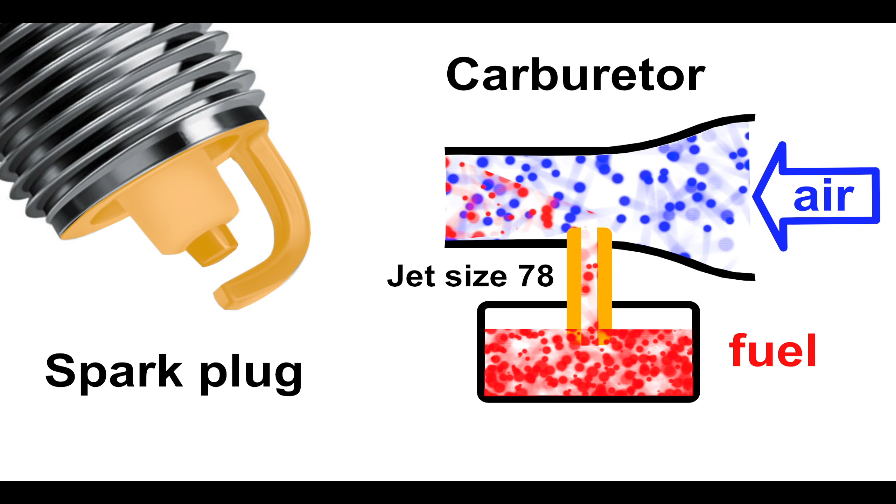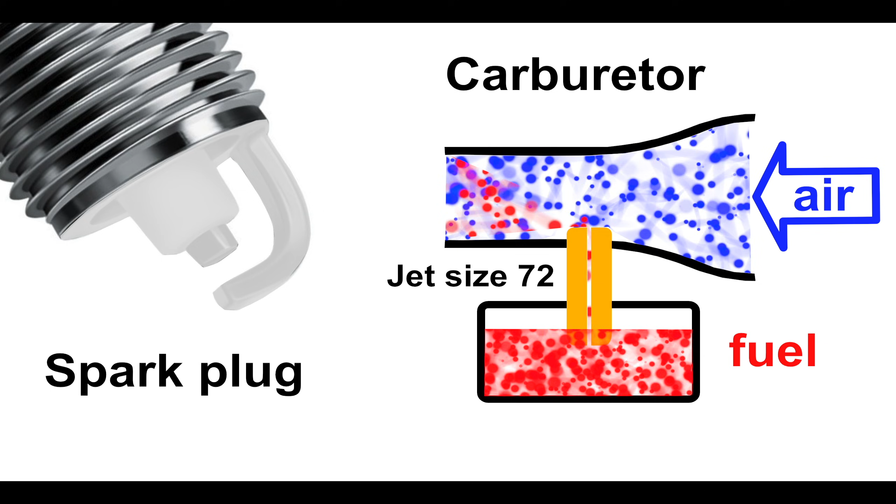First, you must know how a carburetor works. Intake air passes through a tube, and fuel is sucked up through another tube called the jet. If the jet is the right size, you get a good air-to-fuel mixture and the engine runs, and the spark plug will be a light tan or beige color. If the jet is too big, you'll get too much gas, the engine won't run well, and you'll have a black spark plug. If the jet is too small, you don't get enough fuel, and the spark plug tip turns white. A real carburetor works in the same way, but has three main parts.

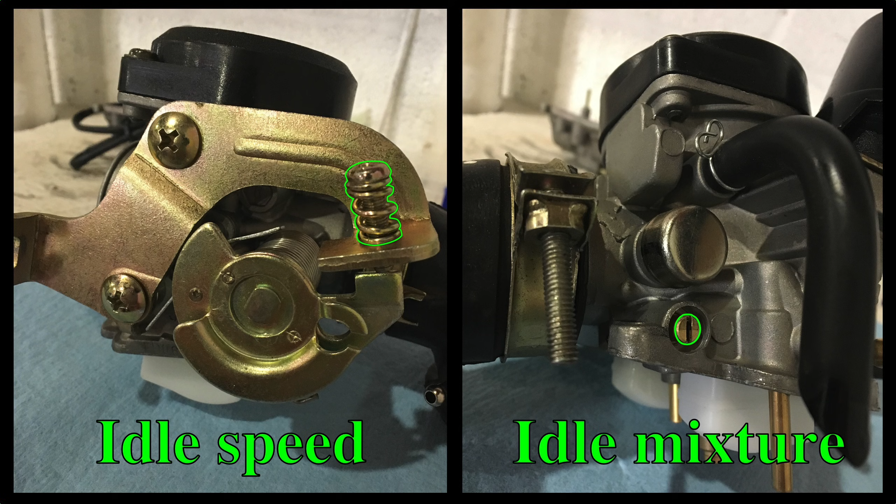When the throttle is closed, the idle circuit controls the mixture. Just above idle, the pilot jet takes over, and from quarter throttle till full throttle, the main jet controls your air-to-fuel mixture. The idle has two adjustments on the outside of the carburetor. The idle speed screw controls the idle air, and the idle mixture screw controls the idle fuel.

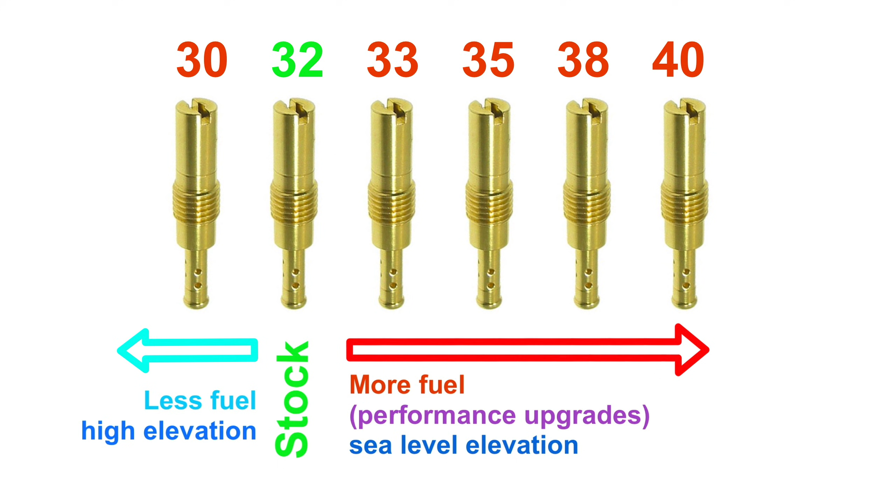To adjust fuel just above idle, you have to replace the pilot jet. A bigger jet lets more gas in. Most 50cc scooters come stock with a size 32 slow jet. The main jet controls fuel from quarter throttle to full throttle, therefore it is the most important one for tuning. Stock size is 75. Go up in size if your engine can move more air, for example, a bigger intake, exhaust, or a bigger piston will move more air. Go down in size if you're at high elevation.

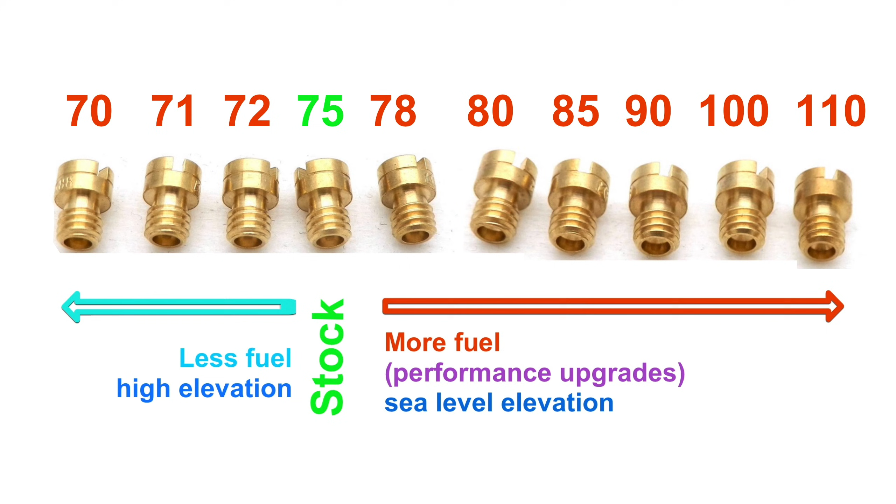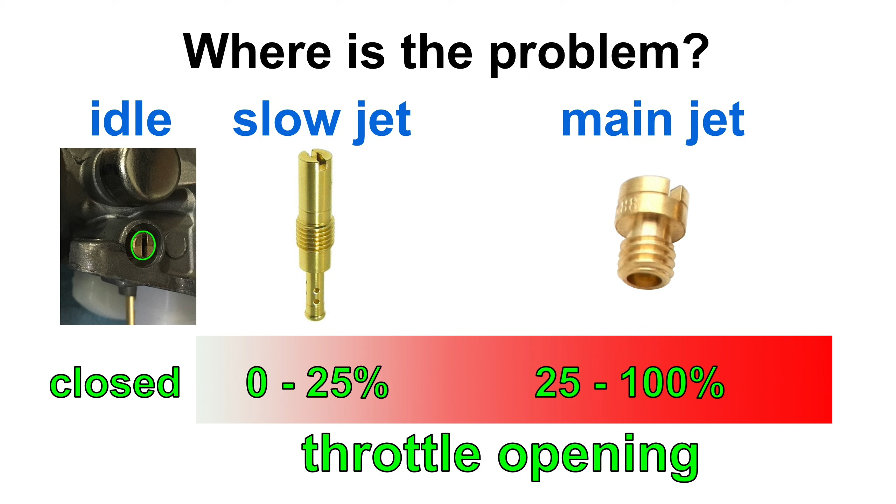Think of carburetor tuning in terms of solving a problem. First, where is the problem? If your scooter isn't idling, go for the idle screws. If it's just above idle, maybe your slow jet is wrong. 25 to 100% throttle is most likely a main jet problem. Second, you must determine what is the problem. This can be tricky because the symptoms can be similar. Too much or too little gas will both make the engine lose power.

Not enough gas will give you a white spark plug and the engine will run better on hot days and after the engine is warmed up. It may also idle better for the first 2 minutes because the idle enricher adds gas. Too much gas gives you a black spark plug and you can usually smell gas in the exhaust. The engine will run better when it's cold because less of the fuel evaporates and temporarily brings the ratio closer to the desired 14.7 to 1.

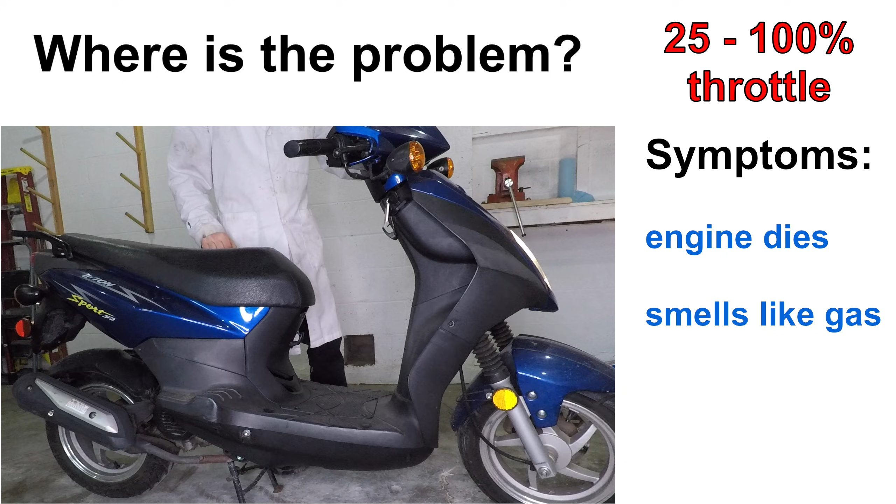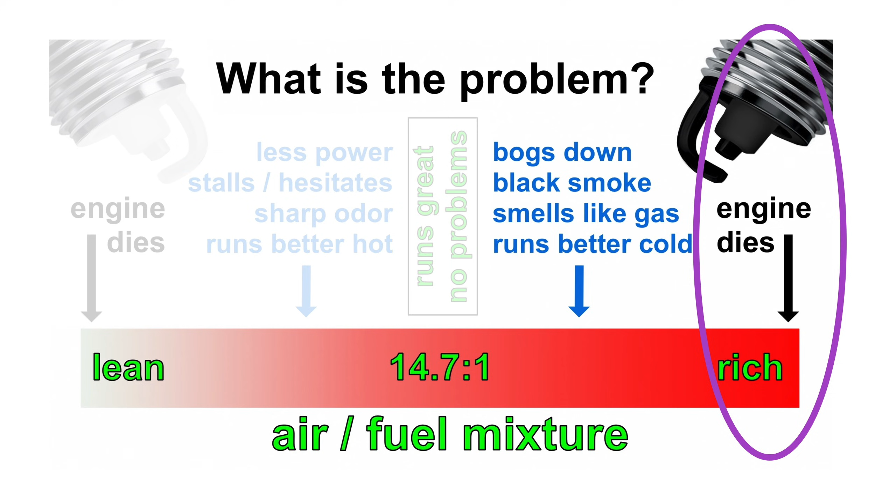Okay, let's check out my scooter. It starts right up and idles really well. When I twist the throttle, it revs up for just a second, but then the engine dies. So my problem is located from 25 to 100% throttle. The exhaust also smells like gas. I'm using a 16mm socket to remove the spark plug, and here it is. The tip is black. All my symptoms point to the engine running too rich. In fact, the air-to-fuel mixture is so far off that the engine won't even run.

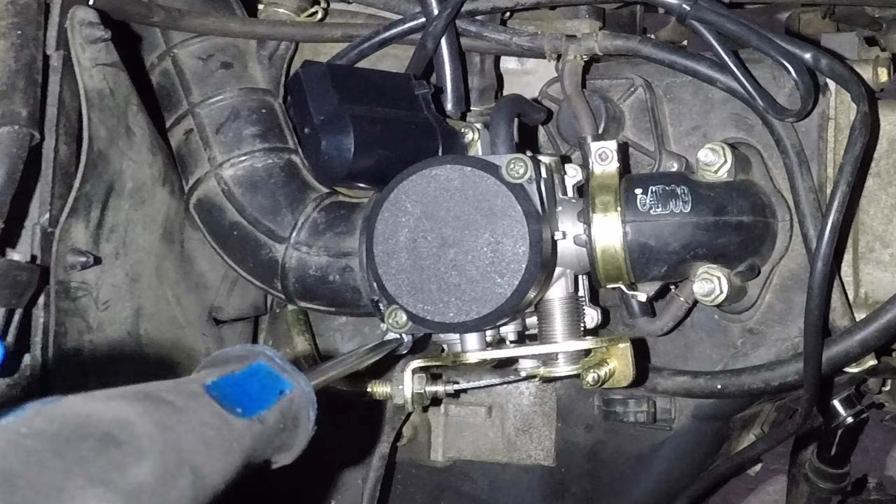To work on the carburetor, you'll need Phillips and flathead screwdrivers, a 10mm socket, and 12mm wrench. Let's pull that carburetor out. Loosen up the intake with a flathead screwdriver, the throttle takes a 12mm wrench, and the intake manifold takes a 10mm socket. Pull off the fuel hose and vacuum hose, and don't forget to unplug the idle enricher. Drain the float bowl gas into the gas tank. Take out 3 screws on the bottom of the carburetor and pull off the float bowl. Use a flathead screwdriver to remove the main jet and pilot jet.

My carburetor had a size 30 pilot jet and a size 92 main jet in it. Let's compare that to the chart. The pilot jet is just smaller than stock, but it seems to work fine. The main jet, however, is way off. I have a stock scooter. I should have a size 75 main jet. I'll need to pick up a main jet kit.

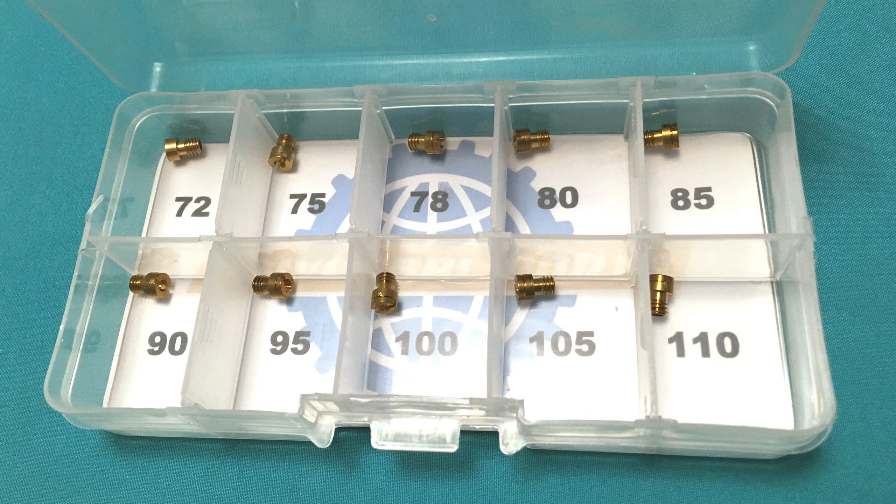I'm installing the size 30 pilot jet back into the carburetor and changing the main jet to a 75. Reinstall the float bowl and 3 screws, then the carburetor goes back in the scooter.

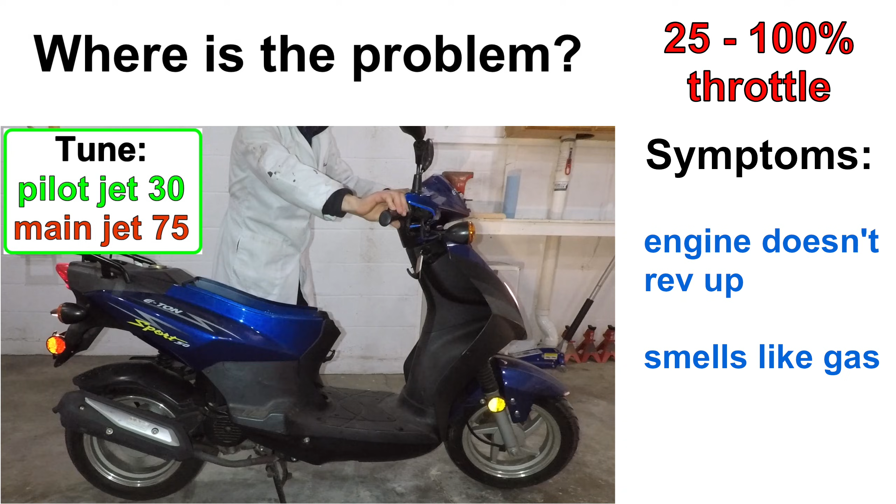Hoses first, then attach it to the airbox and bolt on the intake manifold. Make sure the throttle opens all the way when you twist the throttle grip, and don't forget to plug in the idle enricher. This time when I go to full throttle, the engine doesn't die, but still doesn't rev up like it should. The exhaust still smells like gas. It's definitely better than before, but it looks like the mixture is still way too rich.

I'm using a stock size jet, and this scooter is stock, so why doesn't it work? It's because I'm in Salt Lake City and the elevation here is 4,500 feet above sea level. At low elevation, there are more air molecules, so you can also put more gas in the engine.

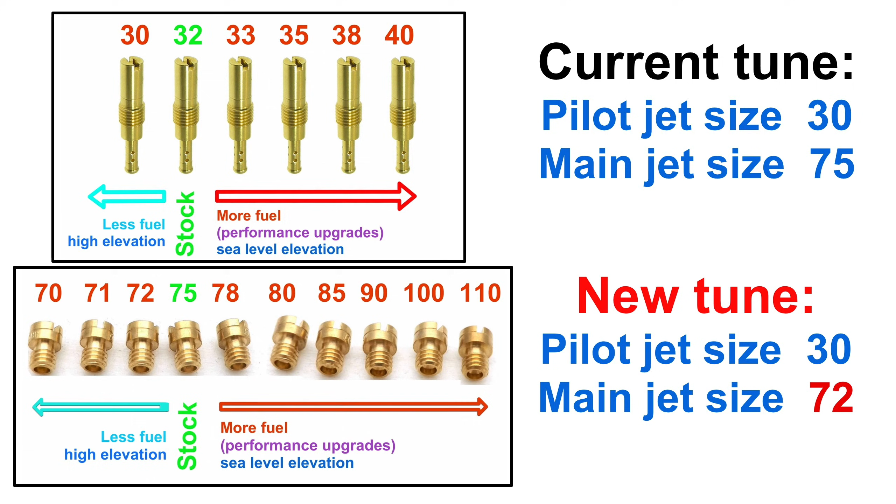Pusheen is having a great time, but when she gets to the top of the mountain, she'll need a smaller main jet because there's less air up there. Let's take another look at the chart. A scooter will actually need a smaller jet than stock at high elevation. I should try a size 72 main jet, and I'll just swap those jets.

Okay, let's see what happens with the size 72 jet. It revs up, but wait a minute, why doesn't it keep going? That's weird. It wants to rev up, but then slows down.

When you get closer to the right air-to-fuel ratio, it gets harder to tell if it's too rich or too lean. The quick way to find out is add a bunch of air by removing the air cleaner.

This time I'm going to full throttle with no air cleaner. I'm temporarily leaning out the mixture. Wow, it's really revving up now. Removing the airbox made a huge difference.

Back to the chart. The engine didn't do well with the 72 main jet until I added some air by taking off the air filter. This means it was still too rich.

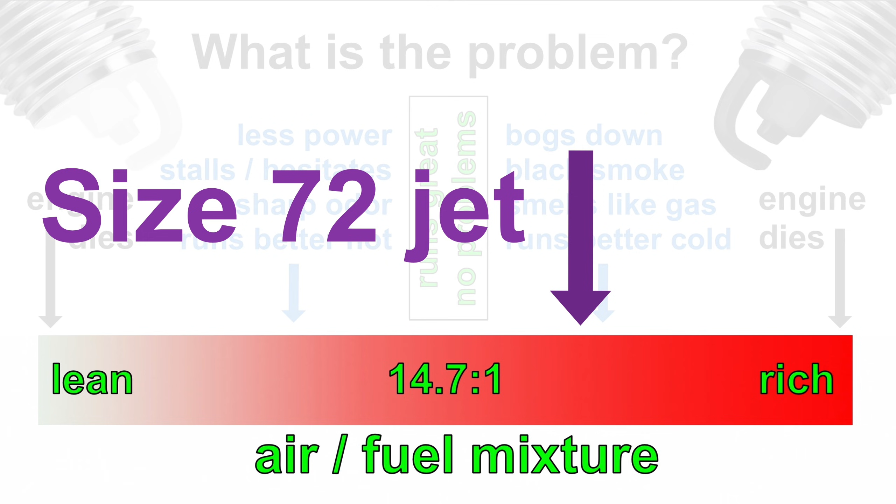I can go back in and get a smaller jet again, but the 50cc scooters are already dangerously slow, and less fuel means less power. I really like how it ran without the stock air box.

I'm going back to partsforscooters.com and picking up a foam air filter. The inner diameter of the filter should be 38 millimeters.

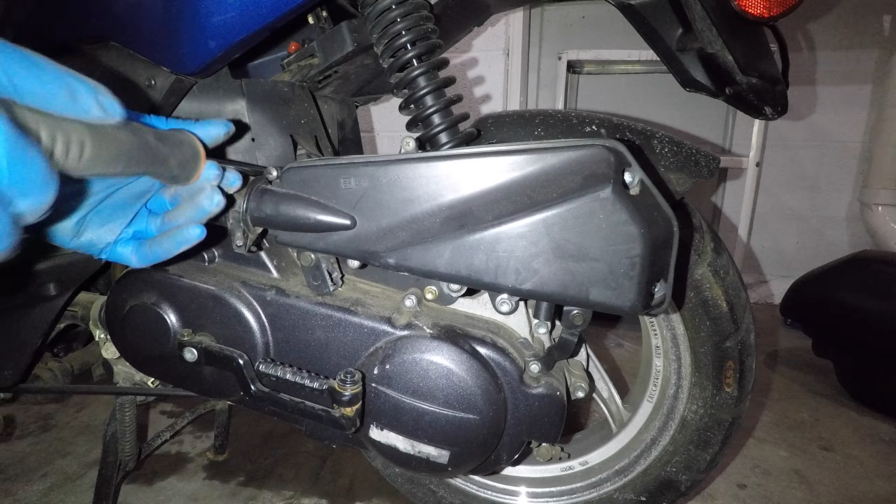Now let's open up that shitty air box. It has a restrictive paper filter and 2 bolts holding it on. One of the brackets is broken.

I'll rip that rubber intake hose out. I'm pulling the crankcase vent hose off the valve cover. I'm saving this hose and the screws. The rest can go in the trash.

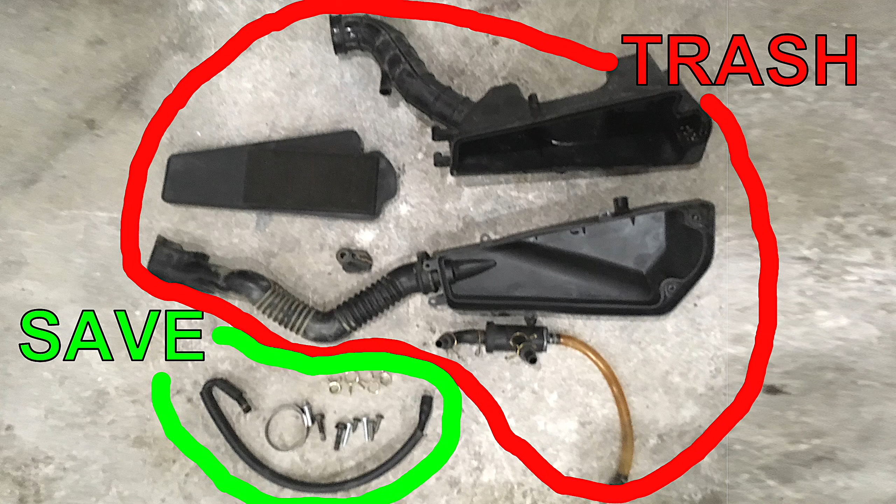Okay, now the foam filter goes on the scooter. The scooter will become much louder with the foam filter, but on the road, louder is safer. The crankcase vent hose can go into the foam filter. This just burns off vapors from your valve cover so they don't go into the atmosphere.

It's time to see how this scooter does on the road. Alright, I'm taking off full throttle with the 72 main jet, and the engine just slows down and almost dies. I thought I had the right main jet, but then I added a lot of air by installing the foam filter. Now I'll need more fuel to get back to the right ratio.

Here's the scooter with the 75 main jet, also barely moving at full throttle. I'll keep moving up in jet size. Let's check out the 80. That's much better. The scooter just takes off, but then again it's still very slow.

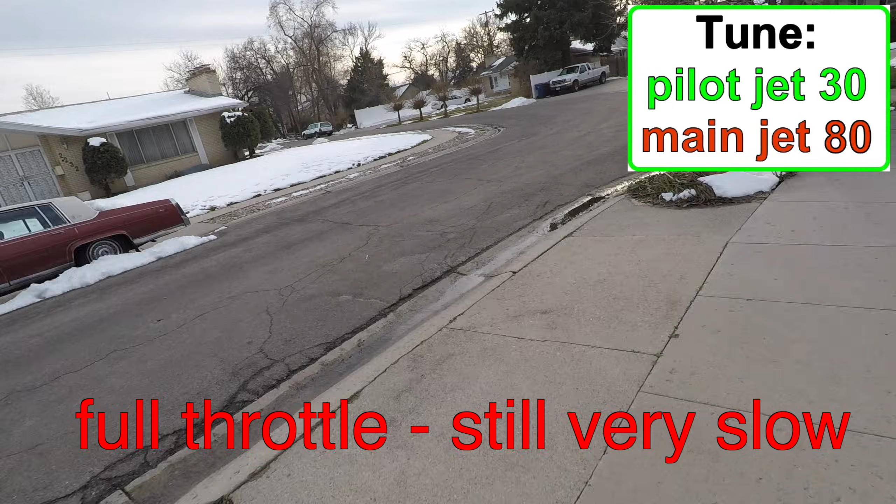I'm only hitting 15 miles per hour here on my street. Another jet swap and I'm up to 85. This time it rides great with no big problems.

I found a nice stretch of road with a high enough speed limit to do a top speed run. The road must be long enough to get up to top speed and it should be flat or just slightly uphill. A downhill road doesn't put enough load on the engine to get a proper test of the main jet. A steep hill would also throw off the test.

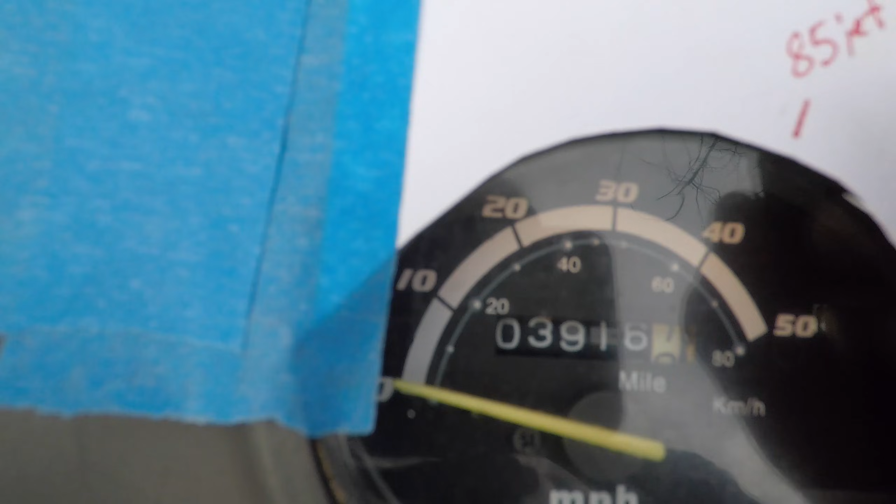And it looks like I hit about 39 miles per hour just now. I'll mark that on the speedometer and go change the jet. Now I'm back out with the size 90 jet on exactly the same stretch of road at full throttle, and it's looking like that's just a bit faster than before.

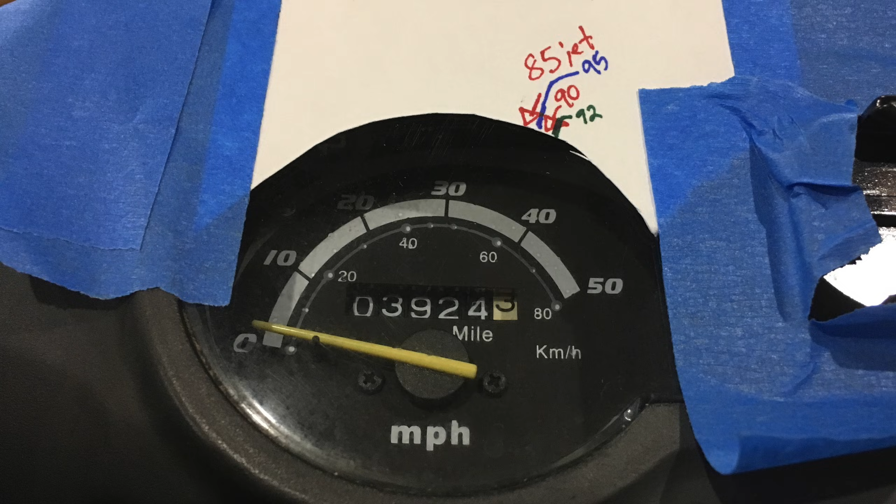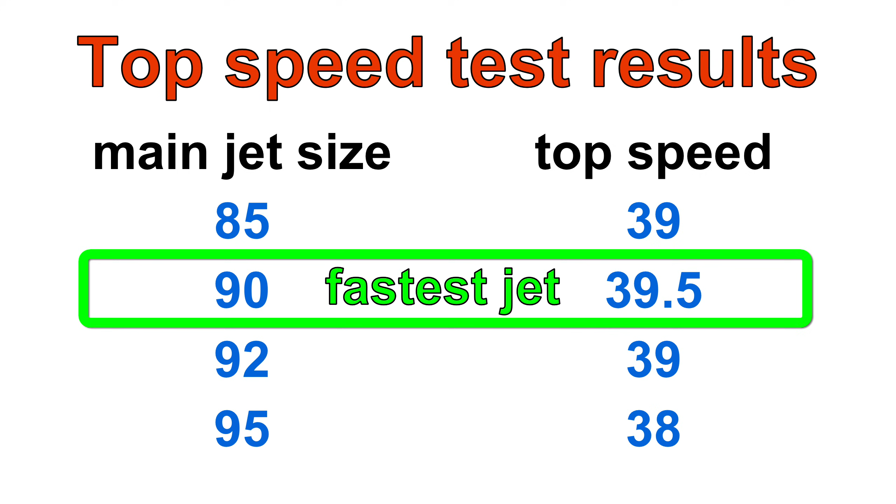I tried 4 different jets and marked their top speeds. I started at 85, moved all the way up to 95, then back down to double check all the jets. And the final results: 85 was good but hesitated a little and got up to 39 miles per hour. Size 90 was the fastest jet, then when I kept going up the scooter was slower. What that means is the engine has the most power at full throttle with a size 90 jet. What that also means is the size 90 jet is the closest to the ideal air to fuel ratio.

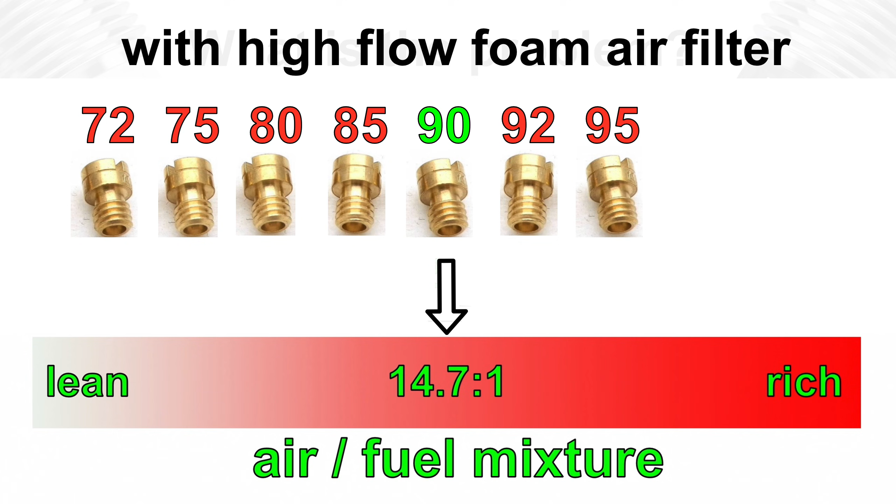It's interesting that this chart is very different from before with the stock air filter. Installing the foam filter allowed me to move up 4 main jet sizes. More fuel means more power, so this proves that an air filter is a very good performance upgrade if you also tune the carburetor properly.

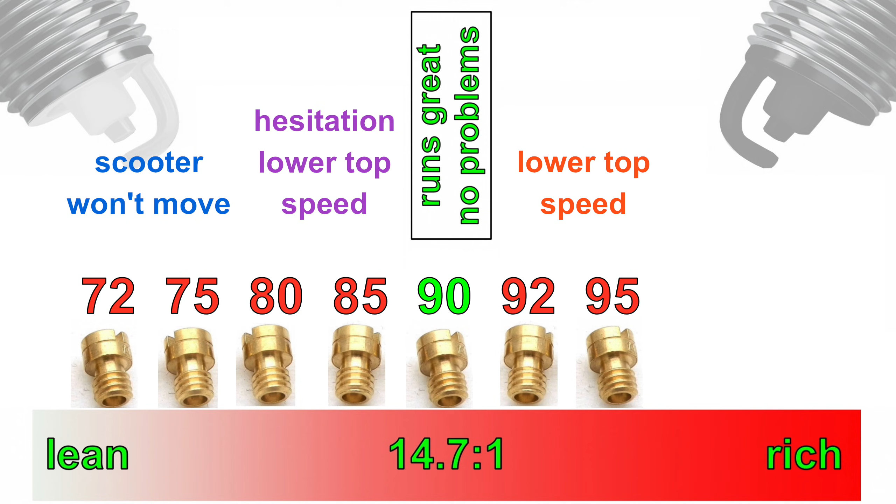I used the symptoms to identify whether to go up or down in jet size. The scooter wouldn't move with the 72 and 75 jets and had hesitation with the 80 and 85. It also slowed down with the 92 and 95 jets. This allows me to place the jets in their exact positions on the air to fuel ratio chart. And that's it, this scooter has the best main jet for its current configuration.

During the tuning process, I've taken this carburetor out about 10 times. It's one of the reasons I love the foam filter, it just makes it so easy. Boom, and that's all it takes. The carburetor is out. Next, I'll need to find the right pilot jet.

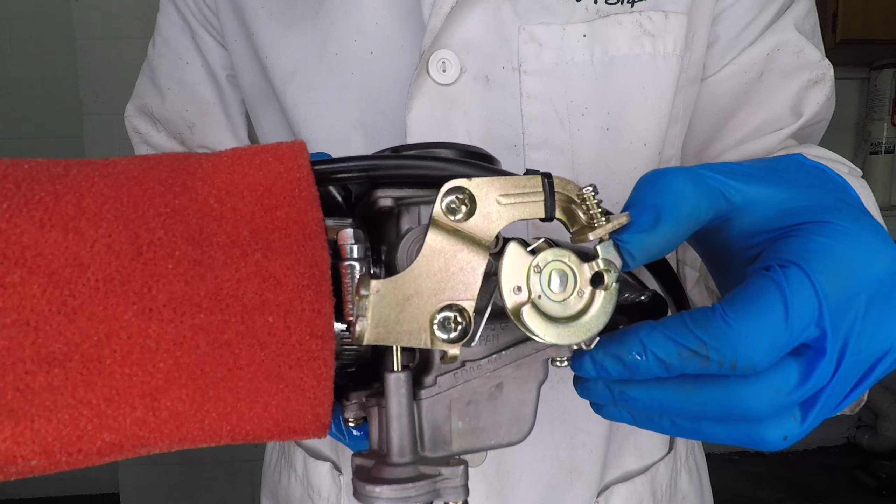This can be a little tricky because the pilot jet only works up to a quarter throttle. So I'm just going to try a couple different jets and see what happens. I'll start by riding my scooter with the size 30 pilot jet and 90 main jet.

The main jet is perfect, so I don't need to worry about it throwing off the air to fuel ratio at all. The scooter runs really well, has no problems idling, but the acceleration is slow. Then again, it's a 50cc scooter. It does seem to hesitate a little bit around 15 miles per hour.

Now I'm trying the 32 pilot jet, and right away it seems to be a tiny bit faster. The little hesitation I felt at 15 miles an hour seems to be gone, but then again, maybe I'm just imagining things. The sound seems to be a little bit more dull just above idle. Does that mean it's too rich?

I decided to leave the 32 pilot jet in and rode the scooter to work. During my commute, a whole list of problems popped up that I didn't have before. The idle was uneven and it died at a stoplight. I had to kick it over several times because it didn't want to start back up right away. Later that day, I had a lot of problems starting the engine and it smelled like gas. The engine seemed to bog down a lot just off idle before it was warmed up.

I switched back to the 30 pilot jet and took the scooter to work again. Starting was good and it had no problems idling. Here's a little comparison of the 2 pilot jets.

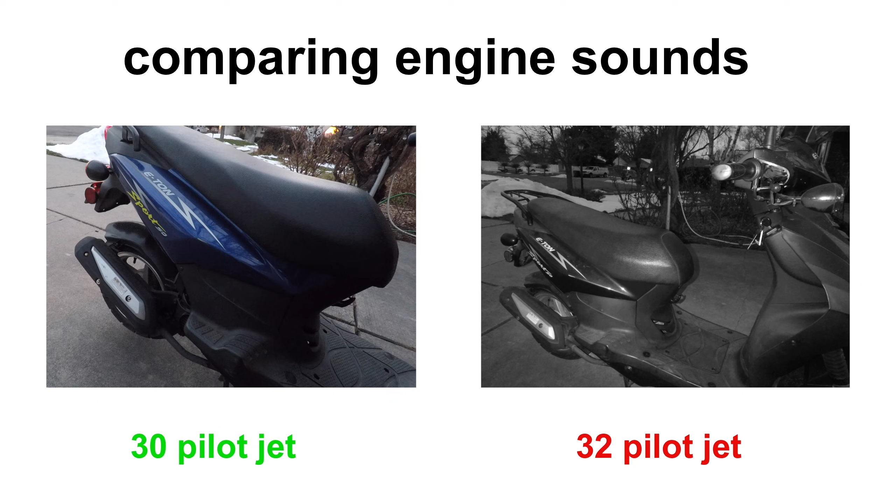The size 30 jet revs pretty nicely just above idle. The 32 makes kind of a dull sound, has a delay when I twist the throttle, and doesn't idle as well. Obviously, the size 30 pilot jet is the right one for my scooter. But the confusing question is, why did the foam filter require a bigger main jet while the pilot jet was not affected? Here's the explanation.

Say, for example, the engine is capable of moving 5 cubic feet per minute of air at full throttle. Now let's say the stock air box is really bad and can only do 3 cubic feet per minute. I have to install a smaller main jet because there's less air at full throttle and I need less gas.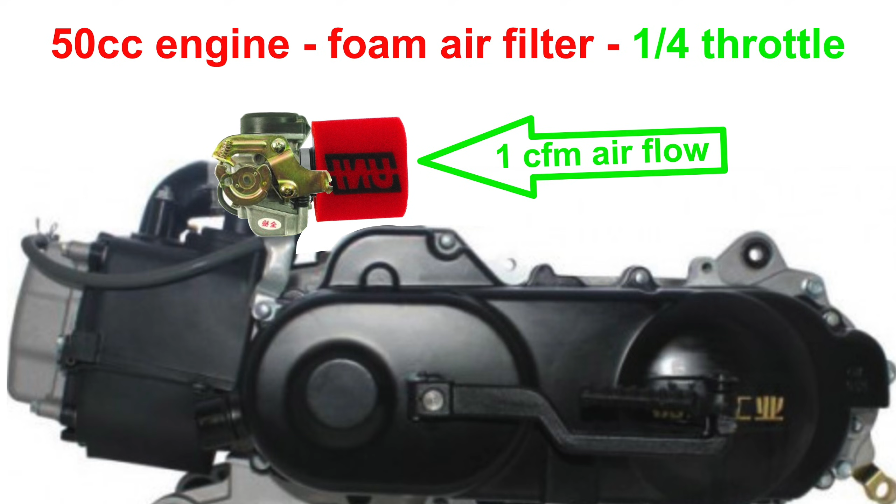When I upgrade the filter to allow 5 CFM through, I can install a bigger jet. When the throttle is a quarter of the way open, the engine is only sucking in 1 CFM. The air filter has no problem letting that amount of air through, so it's not restricting it at all. Changing the filter won't have any effect on which pilot jet I should use, and changing the muffler would also have no effect at quarter throttle. The only thing that affects the pilot jet is elevation or changing the piston size.

The pilot jet and idle are close together, so changing that jet also affects the idle mixture. Too much gas from the pilot jet will also make the idle have too much gas.

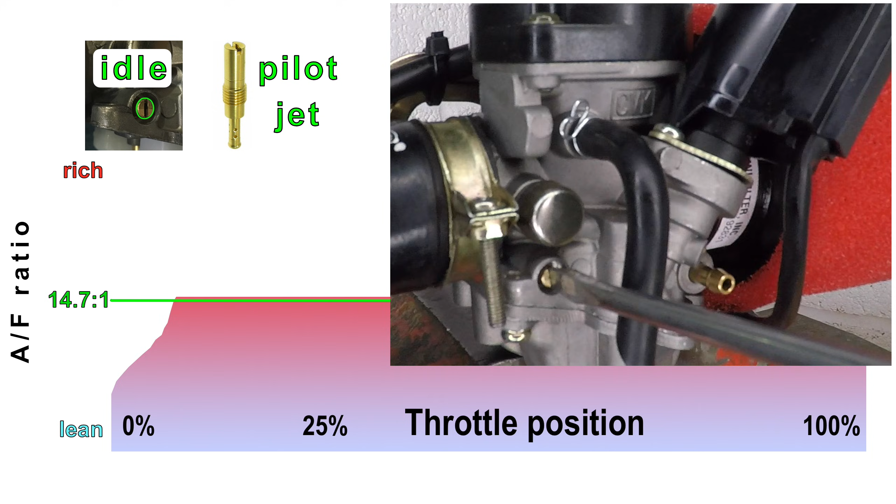The idle mixture screw will adjust the air to fuel ratio at idle. Turning it clockwise closes off the fuel and counterclockwise adds fuel. The idle speed screw changes the position of closed throttle. If it's too high, you'll skip the idle circuit entirely and have the engine idling through the pilot jet.

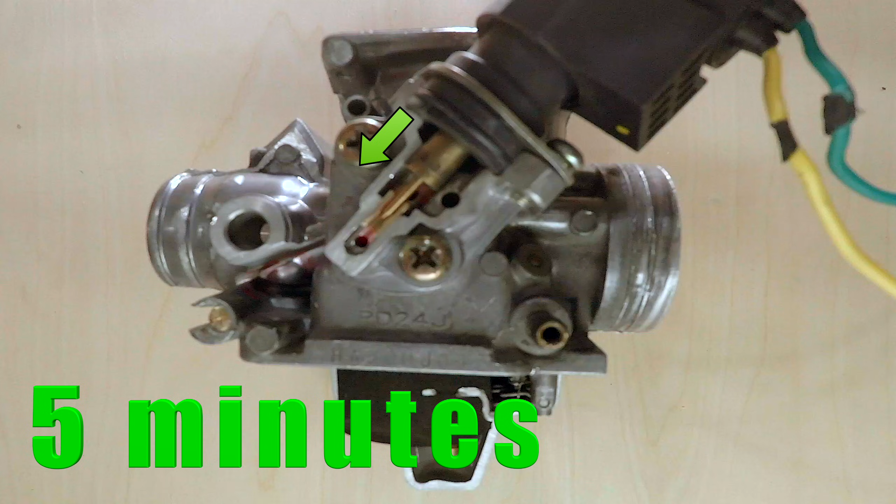Now let's talk about the idle enricher. This is the electronic part of the carburetor. This little solenoid gets power when the engine is running and slowly closes off a port that lets in extra gas. During the first 5 minutes, the idle is more rich to compensate for cold fuel not evaporating as well.

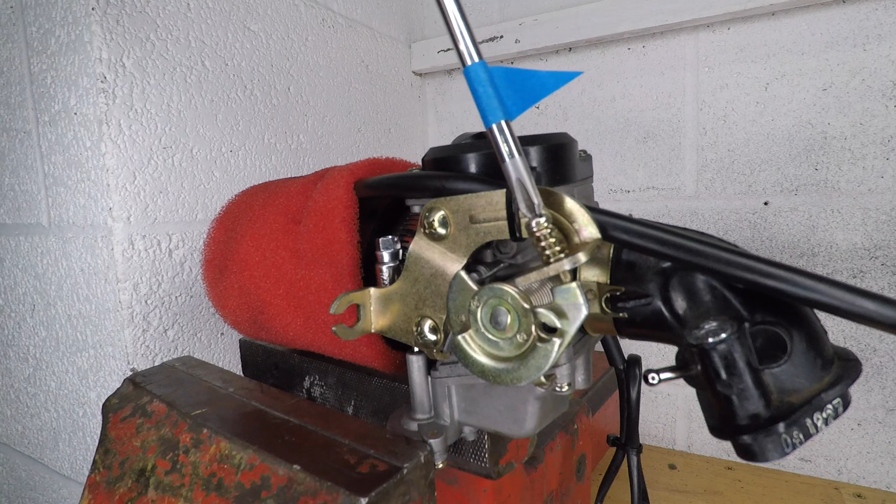Idle adjustment can only be done after the idle enricher is done with its cycle. Start by turning the idle mixture screw all the way clockwise until it stops, then back the screw out 1 turn. Loosen the idle speed screw until it doesn't touch the throttle cam. Then find the point where it contacts and give it 2 full turns clockwise.

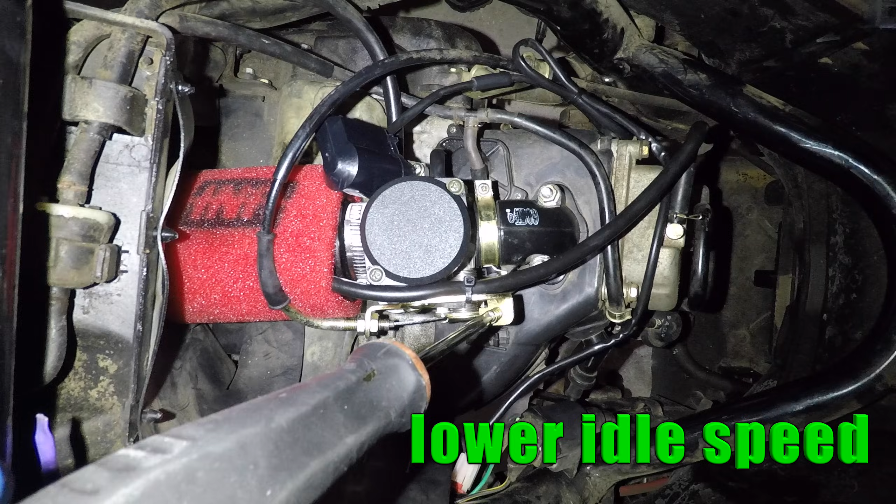These idle settings should be good enough to keep the engine running. Ride the scooter for 5 minutes to let the engine warm up. Turn the idle speed screw counterclockwise to slow down the engine. Find the slowest idle that is stable.

Adjust the idle mixture screw 1/4 turn at a time. Find the point where you get the fastest, smoothest idle. If it gets worse, turn the screw the other direction. Lower the idle speed again, and this time go 1/8 of a turn at a time to find the best idle. The engine takes a couple seconds to respond to changes, so go slow.

See how low my engine will idle? This is only possible with a perfect idle mixture.

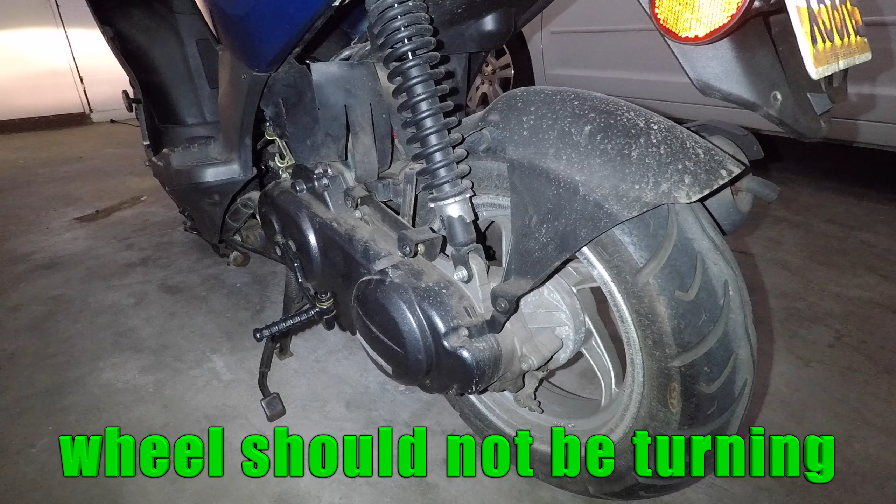Once you can achieve a good low idle without the engine dying, bring it back up to about 2000 RPM. The idle should be high enough that the engine never dies at stoplights, but low enough that the wheel doesn't turn. You might still need to readjust the idle speed after a couple rides, and that's why most scooters have this cover. Leave a screwdriver in the scooter just in case.

So far I've selected a main jet that gives me the highest top speed, a pilot jet that doesn't give me any problems, and I've set the idle. The next adjustment is setting the needle height. The needle affects what the scooter does at mid RPM range, or about 15 miles per hour.

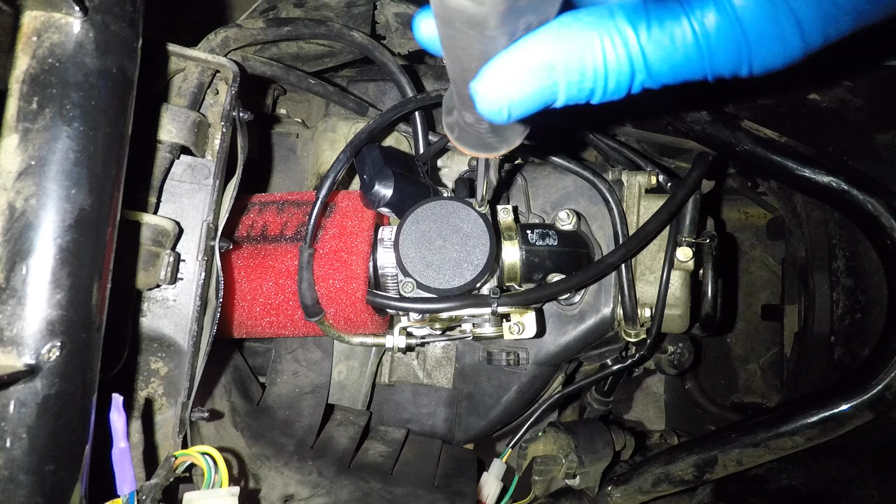When you remove the top of the carburetor, you'll find a spring and a black thing called the throttle slide. It controls air and fuel when you're using the main jet. The long metal thing is the needle. It has a removable clip on top. Make sure the diaphragm edges are seated into the groove when reinstalling it.

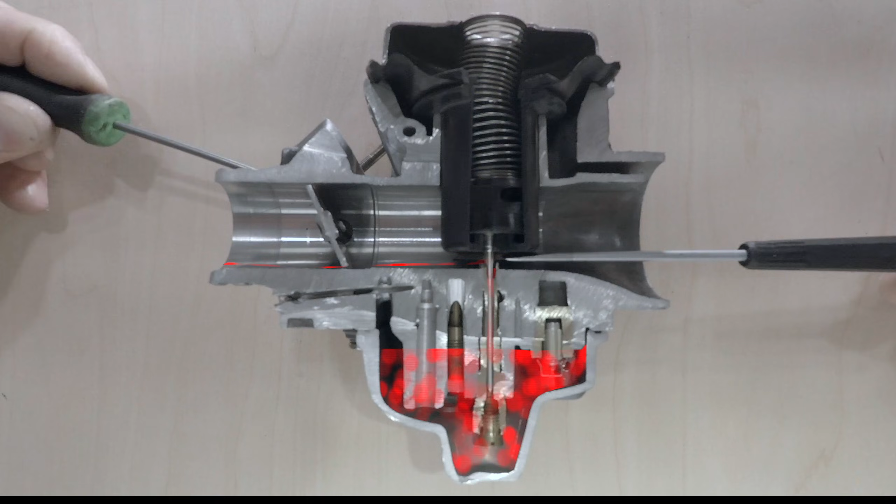If part of it is not seated, the throttle slide won't move up and your scooter will only go 15 miles per hour. As you open the throttle, the slide moves up and so does the needle. The needle starts off by blocking the fuel going through the main jet and lets more fuel through as it moves up. The throttle slide has 2 holes in the bottom of it.

As air flows past, it sucks air out of the diaphragm on top and creates a vacuum that pulls the slide up. This slide moves based on engine RPM, not throttle position. When you twist the throttle all the way, you're not actually at full throttle until the engine has a chance to speed up.

The clip can be installed in different positions to adjust the height of the needle. The needle controls your air to fuel ratio at mid throttle. If you put the clip low, the needle will be high and there's more gas. If you raise the clip, the needle is lower and you get less gas.

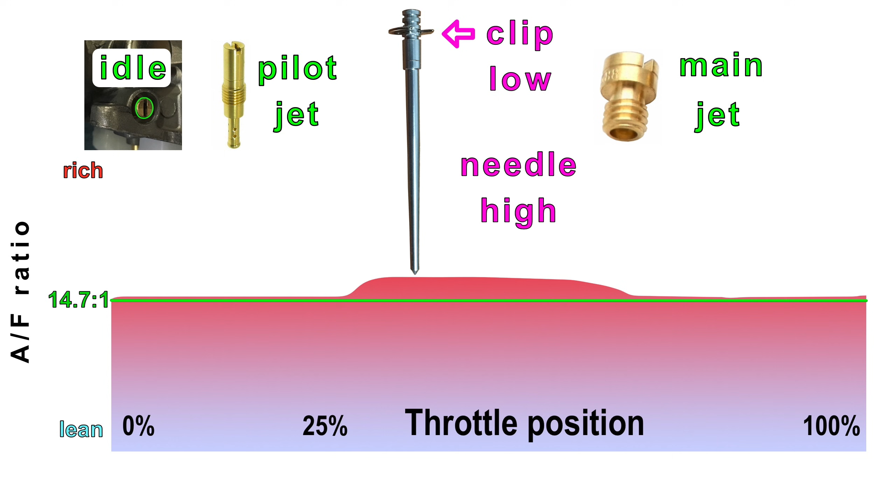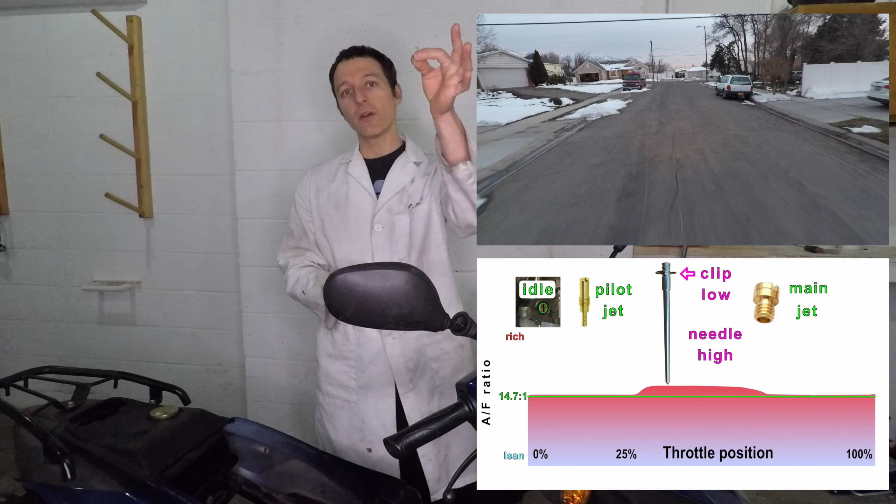This is a fine adjustment and you'll have to try different settings and ride the scooter to find the best one. It's okay to skip this. The stock setting is usually fine. I mentioned earlier that my scooter had a slight hesitation at 15 miles per hour. So I moved the clip down and the needle up, which gave me just a little bit more gas and got rid of that hesitation.

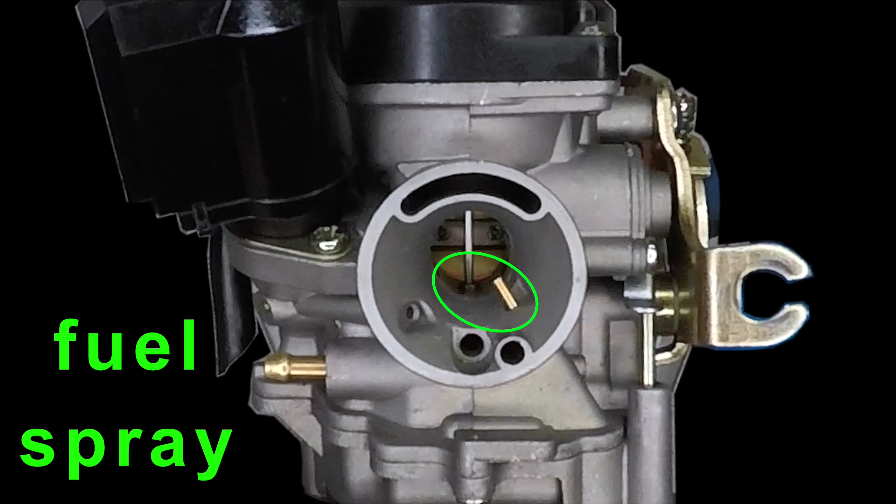Now there's one more piece I want to show you on this carburetor. The accelerator pump is located on the outside of the carburetor and is activated by a cam and a spring as you twist the throttle. It sprays a little bit of extra gas in the intake.

A perfect air to fuel ratio is great, but the engine needs to go a little bit rich in order to speed up. As you twist the throttle, the accelerator pump adds some gas to help. This part is not adjustable, but you could bend the spring to make it spray at a different time if you needed to. That's it. Those are all the adjustments on the CVK carburetor.

But before you go, let me tell you a story. There I was on a brisk 35-degree morning riding my scooter to work. Everything was great, and it turned out to be a really nice day. Got up to 65 degrees. When I went to ride my scooter home, it idled just fine, but when I twisted the throttle, it just died. I couldn't ride home.

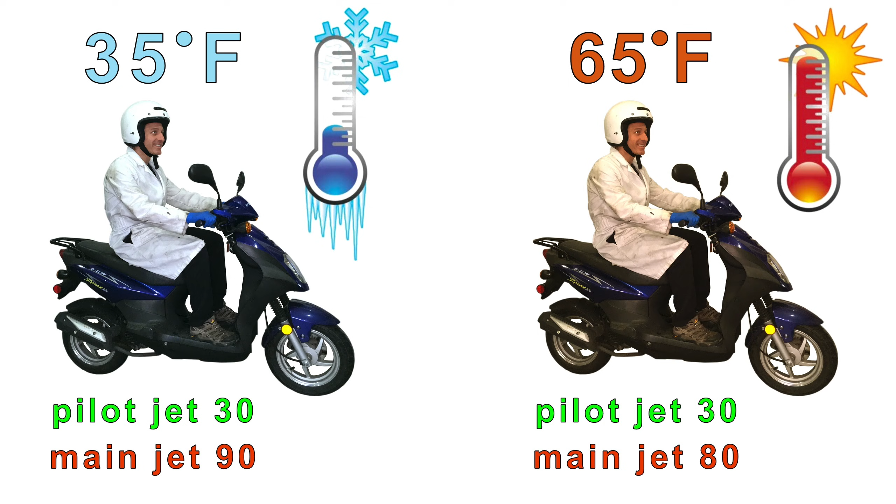So I was thinking, what's going on? Am I a hack? I thought I tuned it right. Turns out, temperature has a huge effect on which main jet you should use. I originally tuned the scooter at 35 degrees. The size 90 main jet gave me the highest top speed.

When the weather warmed up, I tuned the carburetor again. This time the size 80 main jet was the fastest one. It is important that you tune your carburetor at the same temperature as when you will ride the scooter. A winter tune isn't going to help you in the summer.

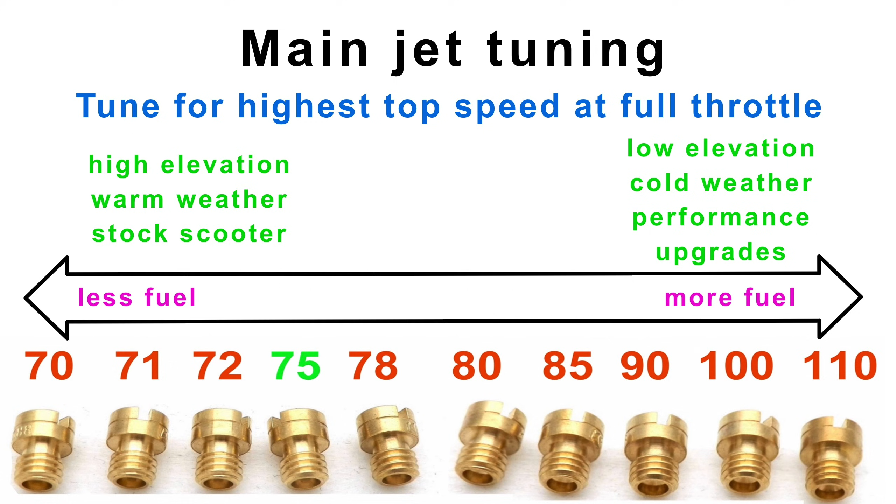I just threw a lot of information at you, so let's do a quick summary. Tune the main jet first. Find the one that gives you the highest top speed. Warm weather and high elevation need a smaller jet. Sea level, cold weather, and performance upgrades usually mean you need to go up in jet size.

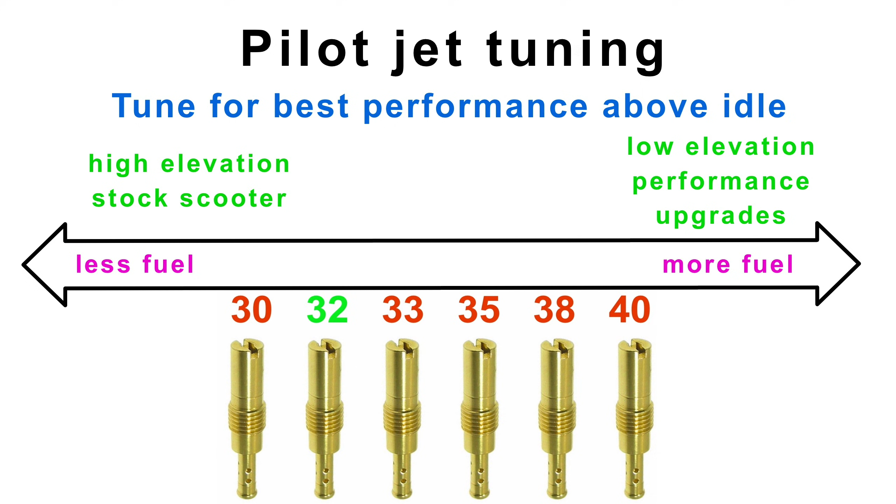Start with the stock size 32 pilot jet and go down if you're at high elevation. Use the jet that doesn't cause starting problems or hesitation. Adjust your idle to get the lowest possible idle speed. At low RPMs, only a perfect mixture will allow the engine to run. Then bring it back up to 2000 RPM.